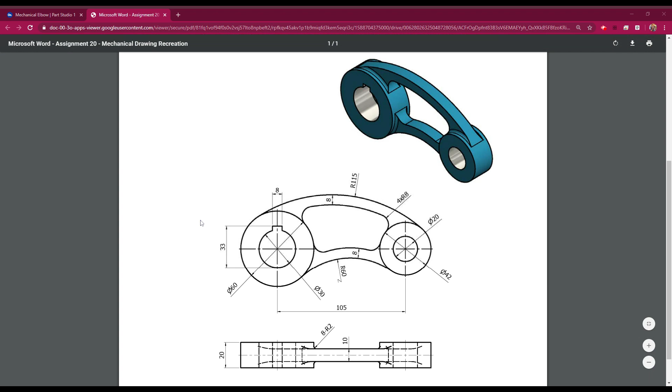You have some main components, these two cylinders, okay? And then you have your distance indicated by the 105. So that's center to center. So that's really giving you the length of the object, and everything else is built upon that. So just make sure that's correct, because if your 105 is off, it's going to be skewed, and then your arches that you create here, or the circles that you create for the arches, are going to be off. So just make sure that you are paying attention to the actual design itself as you move through it.

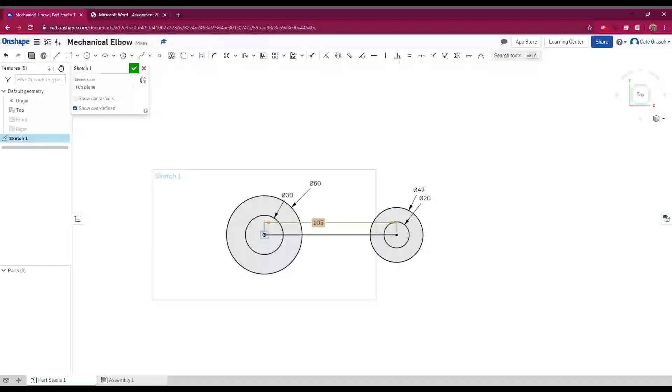So I'm going to go into Onshape. Now, what I've done at this point is I've drawn 4 circles, and then I've made this line to give me my overall length. Okay, so what I did was I made my 30 and 60 circles like we did with the gasket, and then I created just a standard line, made sure it stayed on 0, and made it 105. So that's giving me the overall length of the object.

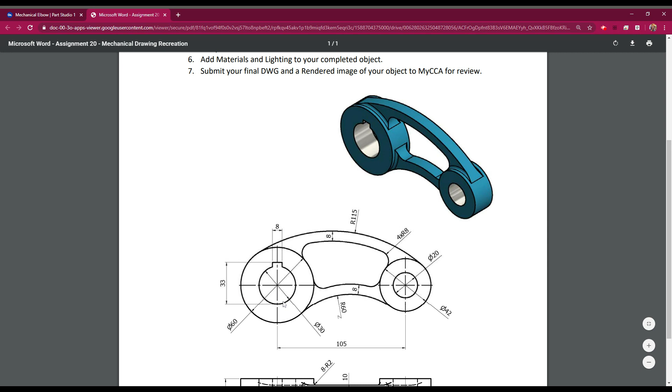Okay. So now what we have to do is create this notch. Now the notch is on center, so you're gonna have 4 on one side and 4 on the other. So what I'm gonna do is I'm gonna create a little line right here, and I'm gonna make sure it's 3 up. Now, if you look at this, the diameter of this internal circle is 30. So when it takes this dimension from endpoint to endpoint really on the circle, or quadrant to quadrant, you have a bump out of 3 on one side. Okay, so it comes out 3. So I'm going to do a 3 unit line.

And then I'm going to use the endpoint of that line to create 2 rectangles. Now, I'm not going to be that precise when I make them, because remember, I've got to dimension them. So I want it to be 4 on each side, and I really just want it to cross into the circle. So again, do the same thing over here. Use my dimension tool to decide on the line. I'm going to make it 4.

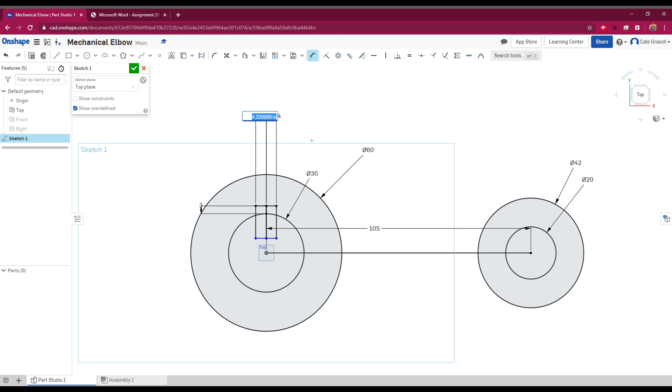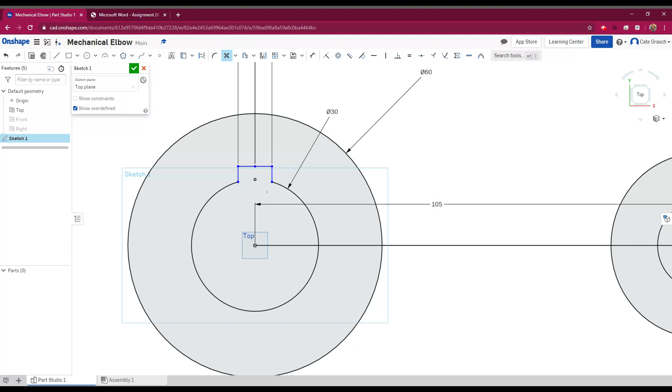Okay, so now I have my notch, but I have a bunch of other items that I don't need in there. So I'm going to use this trim tool, and I'm just going to start taking out portions of this, the references that I used to create it. Okay, there she goes. Okay, so now I have my notch. Okay, and I have my secondary. So the biggest task in this one is to create those arms here.

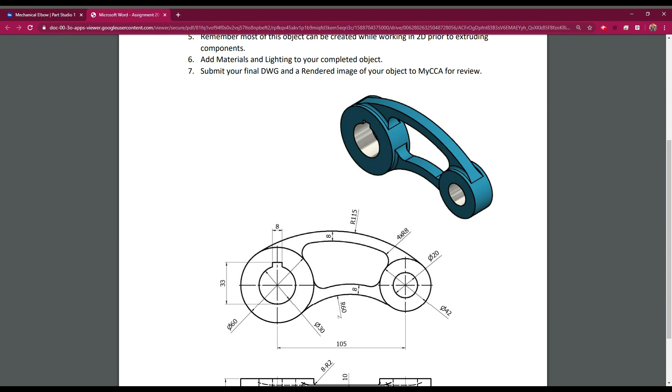Okay, so what we're going to do is we're going to create a circle. We're going to make sure this circle has the proper dimension. So if it's 115 for this radius, it's going to be from a 230 circle. So 230, okay. And then I make sure I come off the dimension tool, select it, and then I should be able to move it. You know, sometimes it's a little wonky like that. Okay, so basically I want it to cross the plane on both sides of my circle. So if I look now, that one's not crossing, that one is. So let's see if I can get it to move for me again.

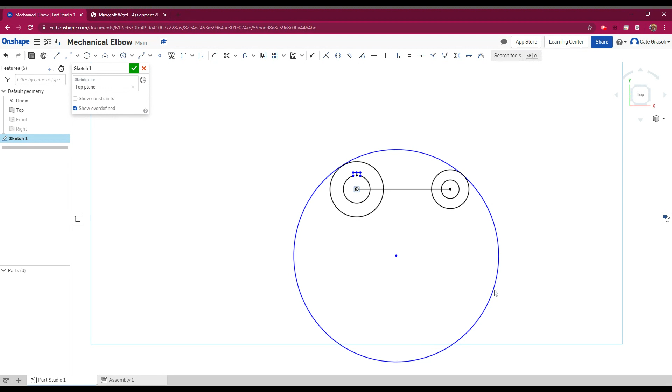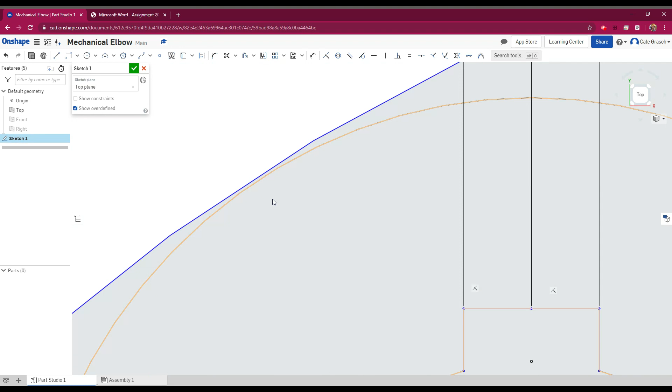And seems to be okay over here. And then I'm going to check over here. No. Okay, so just make sure you have enough room, and okay, doesn't want to get past there, so I have to move it out and back again because for some reason it's latching right over there. Okay, so say we use that to be on the safe side.

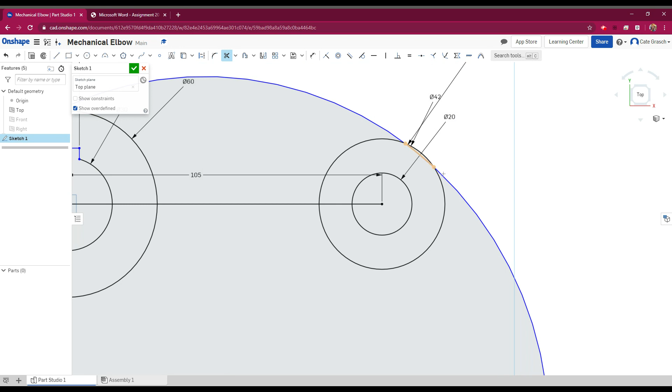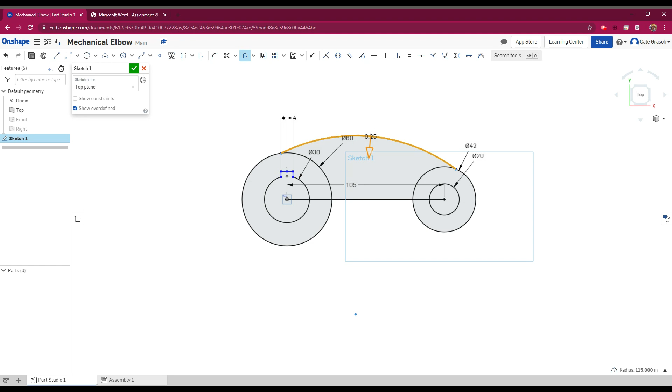Okay, now because of where it's placed, I should be able to trim this out. Now I don't love where that's placed, but we're just going to leave it. But if it's not hitting a point on that circle, it's not going to cut, and then you'll run into issues later. So I'm going to select that. Want it to go internal. I'm going to say yes, and then it's going to ask me how large. I want it to be 8 units in from there. And now I can make the bottom one.

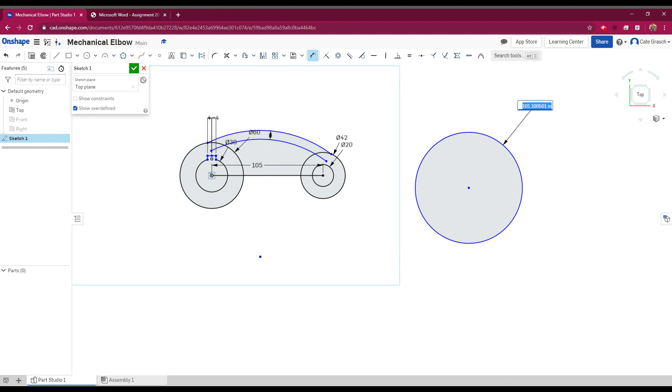So I'm going to open that up, and the bottom one is at 60. So I'm going to go with this and I'm going to make, oops, come on, click, drag. And it says that one's a radius of 60, so I'll make it 120. I'm going to come off that dimension tool and then I'm going to grab it and I'm going to move that one.

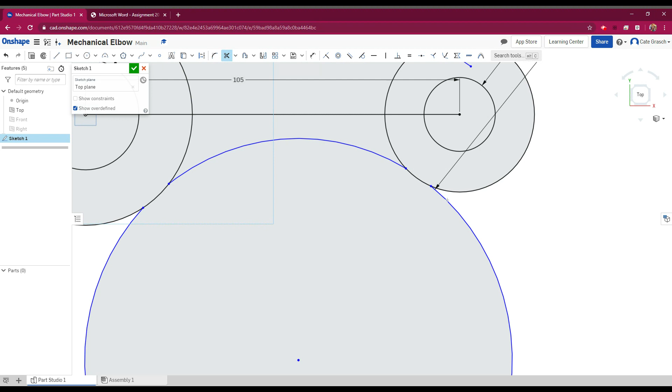Now, same deal here. Okay. Where I'm going to deal with it, I'm going to cut it right there. Okay. So then you should still be able to cut it because you have those internal, you can see how it really does cut inside. Okay. So now this one I'm a little happier with.

So this, we're going to do an offset again. Ooh. And I want it to be 8 in. Okay. So now I have both of those. You're going to want to take your trim and trim that out. Okay. So just go ahead and click on what you don't want.

Okay. So then if you look at our design, we have this internal fillet. So what we're going to do is we're going to do circles to create that. So I'm going to make a circle and I'm going to select it and I'm going to make the radius of it, or the diameter of it, 16. And then I'm going to come off of that, select it and move it into place.

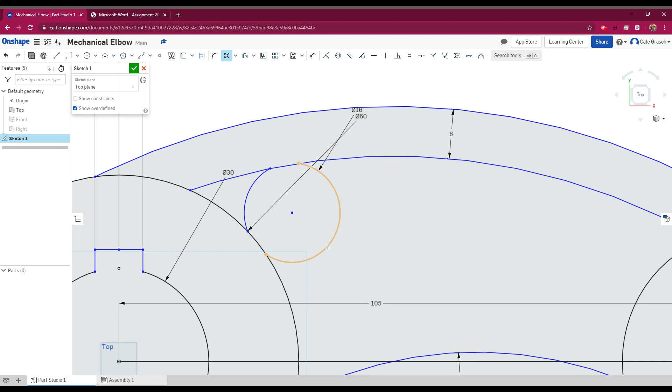And you really want it to kind of blend with your entity. Zoom in, okay, and take out anything that crosses over. And then you also want to take out that leg of the line right there. Okay, not perfect. So I'd have to say that's one of the things I don't love about this program, and it may just be my inexperience, but I really want it to be a little bit more precise than it is.

So then again, I'm going to do a 16 circle. I'm going to turn this off, and then I'm going to bring this in and place it as well. So if I do it right, when I use my trim tool and I zoom in, I'll just crop this out. Now I should be being a little bit more precise than I'm being. Uh-oh. That didn't make me happy. Okay, good. All right, everything's gray, so you know everything can be extruded. So that's a good thing.

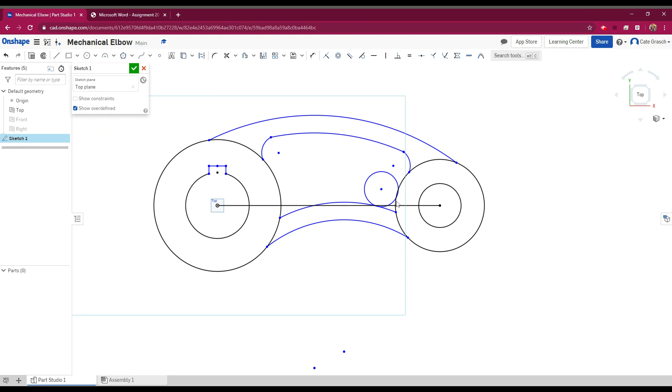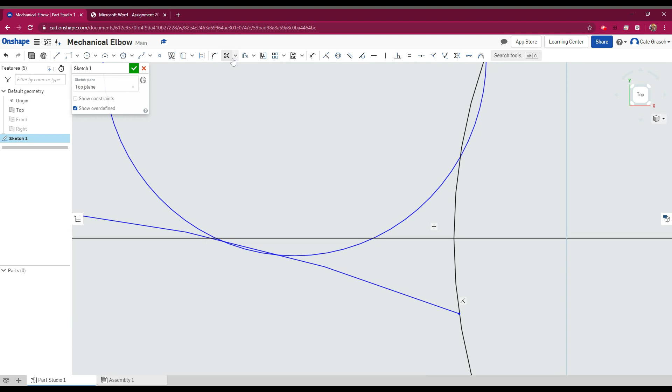And then if I do another circle here, make sure I'm doing it right. 16 again. Come off the dimension tool, select it, and bring it into my drawing. Okay. Now that looks like it's okay. Yeah. Okay, so now I'm going to take my trim tool. I'm going to go in here, and I'm going to go in here, and I'm going to go there. Okay, that looks okay.

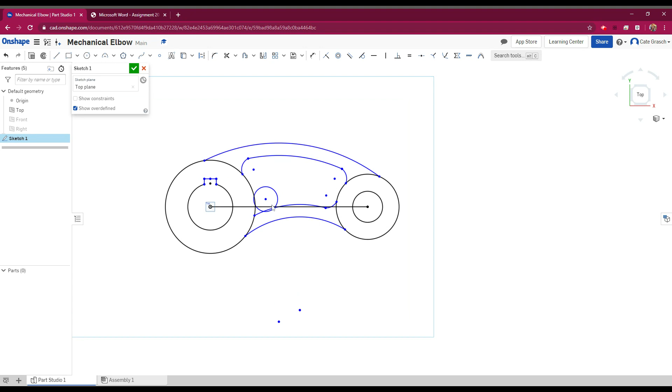Then again, I'm going to do it over here. Okay, and then I want this one to be 16. And I come off the dimension tool, and I want to move it. And it's going to come into here. Oops, that wasn't as pretty as I'd like it to be. So I'm going to move it. Okay. So it's being weird. It wants to hover around that one spot. So I'm going to, okay. I'm happy enough with that.

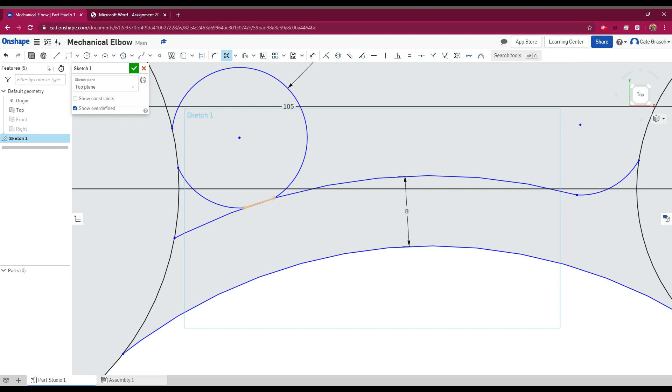It gets a little wonky because it's Onshape, I guess. And I'm going to take that out, and then I'm going to take this out. Okay. So then come off the trim tool, and you don't need this line anymore. Okay. So what we're going to do is we're going to extrude this. So I want to extrude it, but I don't want that, and I don't want that, and I don't want that. Go away. Oops. I'm sorry, it's slow to respond, so I'm kind of, okay.

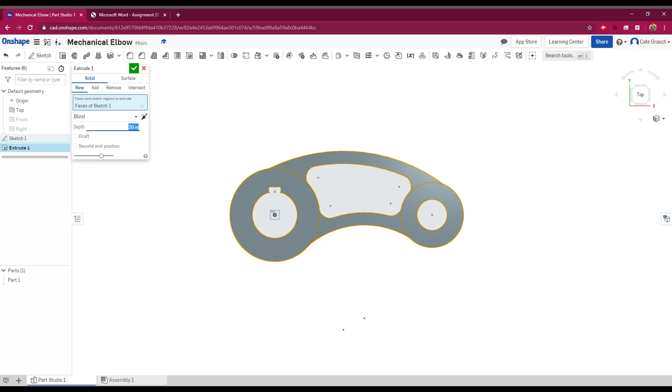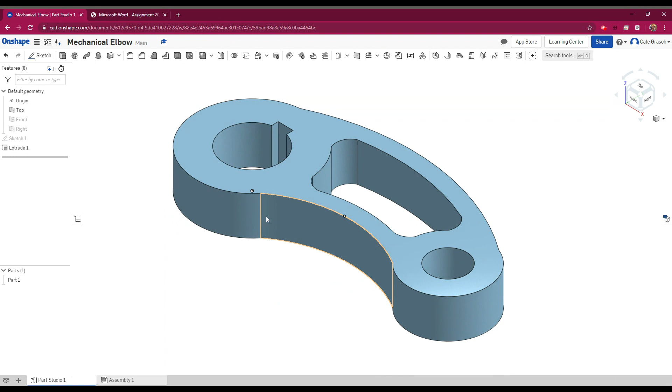So I'm going to say I want this whole thing to be 20. And then if I do that, let's see what we got here. Okay, and it extrudes it all as one piece. Now, we're going to leave it like that. The reason we're going to leave it like that is because I screwed up. Okay, so let's try something here. We're going to go back to the top.